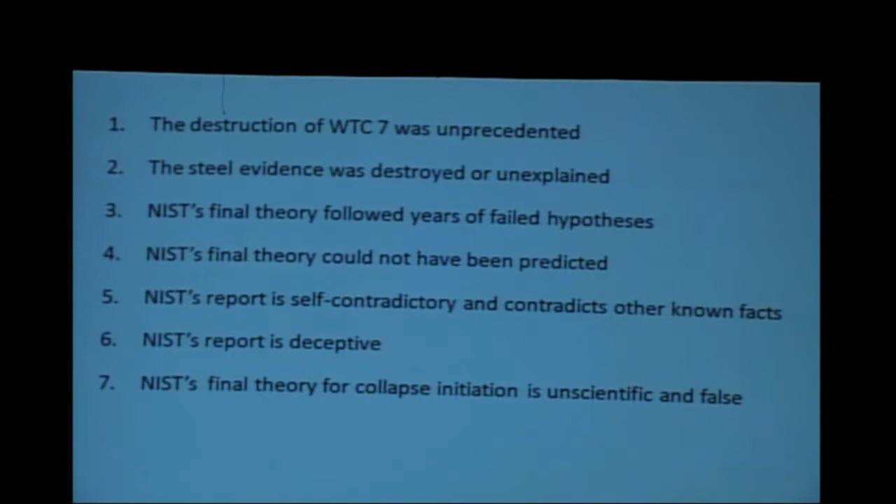And finally, I will summarize how NIST's report was deceptive in many ways and how NIST's final theory is unscientific and false. I'll cover NIST's report only up to the point of collapse initiation, and my colleague Tony Szamboti will take it from there, and he'll discuss the structural aspects and dynamics of building collapse and the NIST report in that respect.

So again, it's a non-controversial fact that the destruction of Building 7 was unprecedented. Both of the major investigative bodies of the government made statements to that effect. FEMA, the first investigative body, said the performance of Building 7 is significant because it appears the collapse was due primarily to fire rather than any impact damage from the collapsing towers. This was when they published their report in 2002. And NIST said this was the first known instance of total collapse of a tall building primarily due to fires.

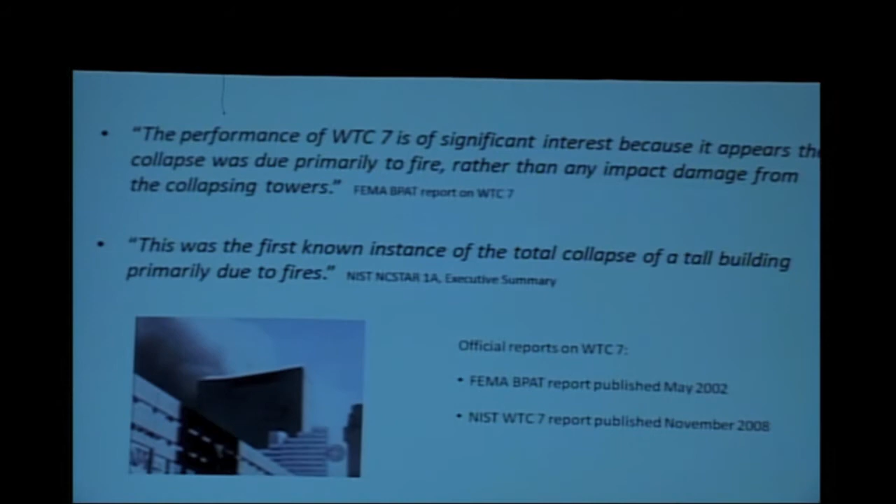And as we've discussed already today, there have been many fires in tall buildings over a period of more than 100 years, but there's not been one instance outside of 9/11 in which a building has suffered complete global collapse from anything other than demolition. Even on 9/11, not all the buildings that were on fire suffered global collapse.

Government scientists spent years trying to offer non-explosive explanations for the destruction of Building 7. The most influential hypotheses and the most long-lasting included one that said that fires fed by diesel fuel tanks within the building were responsible for generating extraordinary heat.

The New York Times reported that massive structural beams that functioned as a sort of bridge to hold up the 47-story Building 7 were compromised in a disastrous blaze fed by diesel fuel, leading to the building's collapse, investigators have concluded in a preliminary report. That article from the New York Times was not exactly accurate.

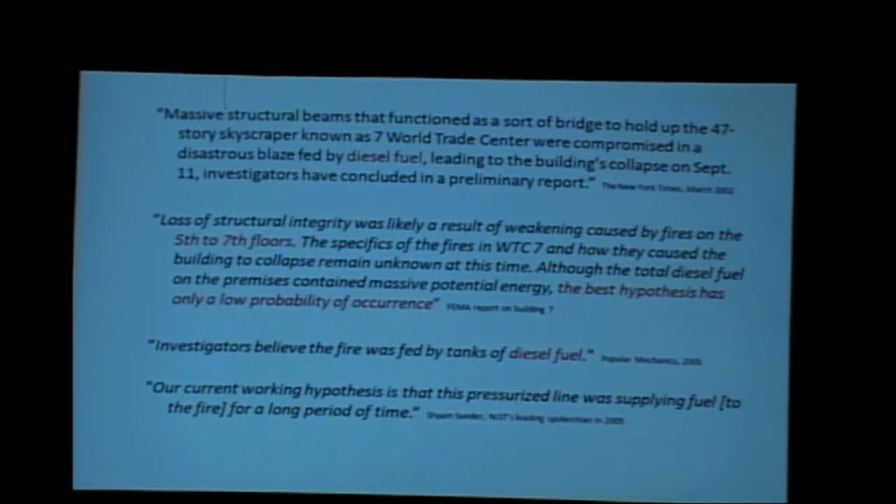The specifics of the fires and how they caused the building to collapse remain unknown at this time, although the total diesel fuel in the premises contained massive potential energy, and the best hypothesis has a low probability of occurrence.

They were supported by popular media, Popular Mechanics specifically, which said that investigators believe the fire was fed by tanks of diesel fuel. You may know that this book by Popular Mechanics is often referred to by people who are supporting the official story. And Shyam Sunder, who was mentioned before, said our current working hypothesis is that this pressurized line was supplying fuel to the building and the fire for a long period of time.

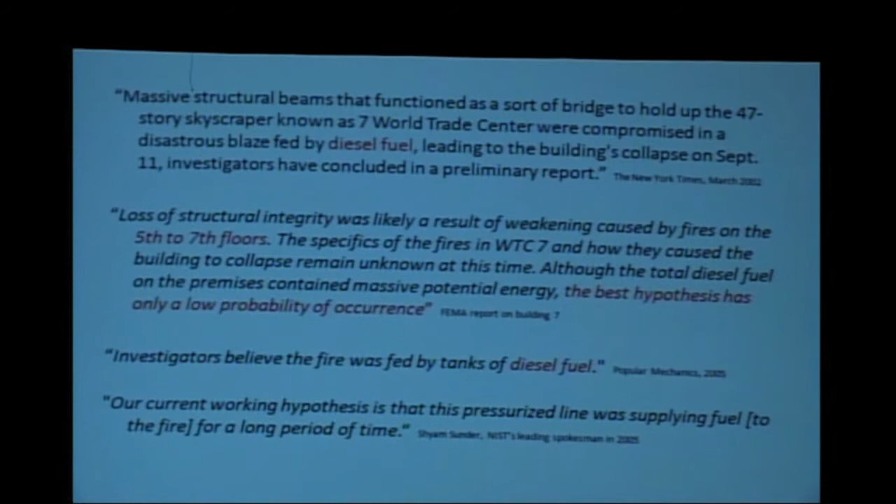Although this hypothesis was promoted for years, neither the diesel fuel nor the transfer girder failure made it into the final theory. Diesel fuels were not the cause, as NIST said. Diesel fuel fires did not play a role in the collapse of Building 7. Damage from the falling Tower 1 was also not the cause. That was often referred to.

Other than initiating the fires in Building 7, the damage from the debris from Tower 1 had little effect on initiating the collapse of Building 7. And again, the design of the building over the Con Ed substation with the transfer girders you see in the diagram below, that was also not the cause.

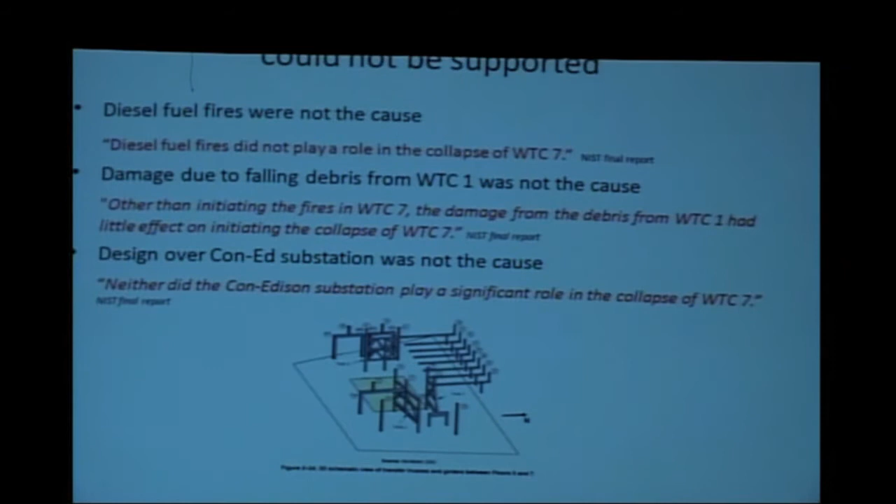What scientists and forensic investigators usually do is look for evidence. We know that there was no precedent for such an event, but what evidence do we have for a fire-based theory? Unfortunately, most of the physical evidence was destroyed, and NIST said that no steel samples from Building 7 were available for its investigation. That was not true, and we'll see that.

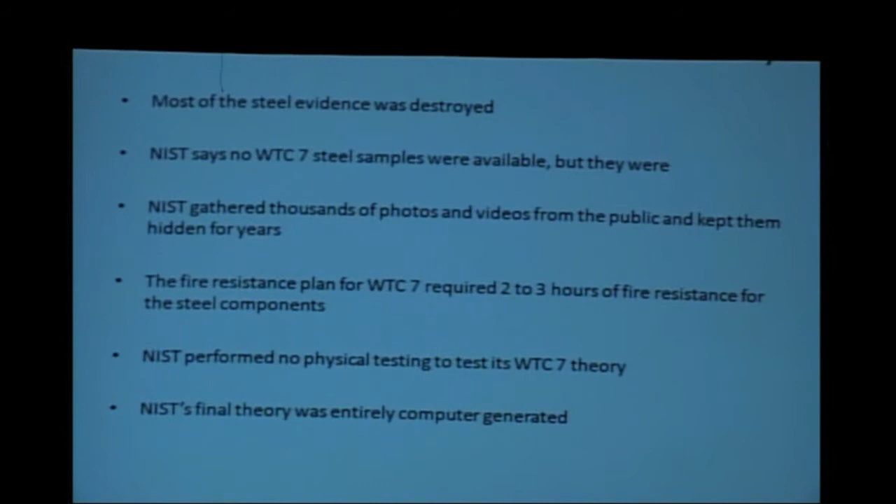Additionally, NIST collected thousands of photos and videos from the public over a period of years and kept them hidden from the public. They have only recently released some of those. We also have documents that establish the fire resistance plan for the building, and that is important evidence related to a fire-based theory.

Important evidence also could have been gained through physical testing of steel components. Unfortunately, no such testing was done, despite the fact that the testing would have been relatively easy and straightforward. In the end, this theory was based entirely on computer modeling.

As we see here, the U.S. House Committee on Science reported on the destruction of the steel evidence. They said in the month that lapsed between the terrorist attacks and the deployment of the FEMA team, a significant amount of steel debris was removed from the rubble pile, cut into smaller sections, and either melted at the recycling plant or shipped out of the U.S. Some of the critical pieces of steel were gone before the first FEMA team member ever reached the site.

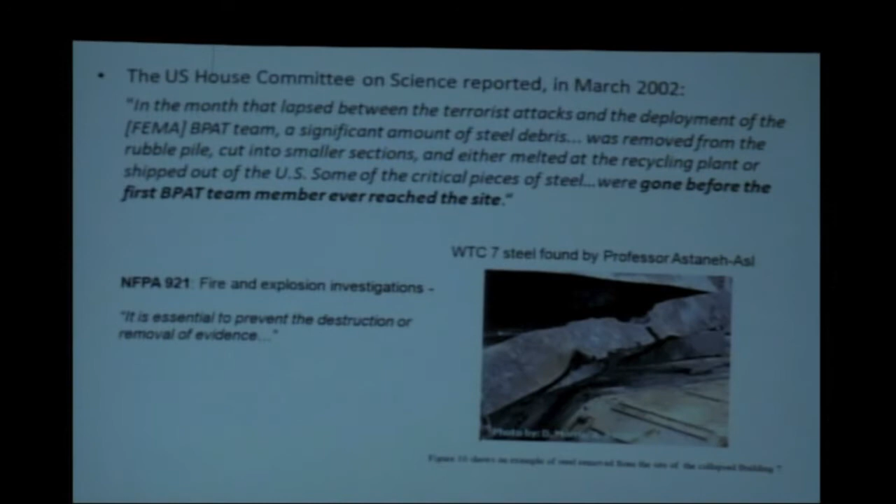This unprecedented destruction of evidence continued throughout the cleanup effort, even when the investigators were there. A good question that remains unanswered is why did official investigators, including the National Institute for Standards and Technology, not follow the national standard for fire investigation?

Part of the standard, which is called NFPA 921, states that it is essential to prevent the destruction or removal of evidence. That may seem obvious to most of us. Removal of the evidence may have had something to do with the nature of the evidence itself.

NIST told us that not one piece of steel from this huge building was left for its investigation, but that was not true, as I said. This sample was photographed by a professor from the University of California in Berkeley. He had been granted access to areas near Ground Zero through a National Science Foundation project.

He examined a number of unusual samples as early as 1 week after 9/11, and this sample looks like it has some odd burns or cuts in the steel, and that same professor later stated that he saw melted girders at the World Trade Center.

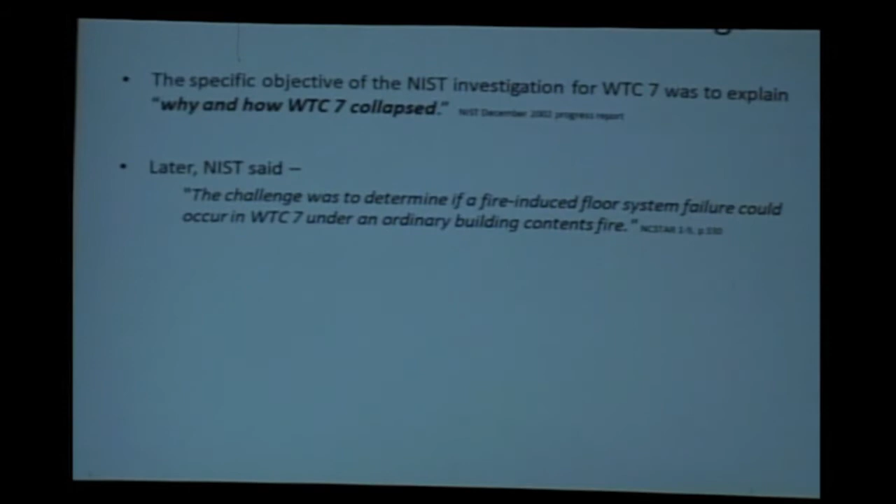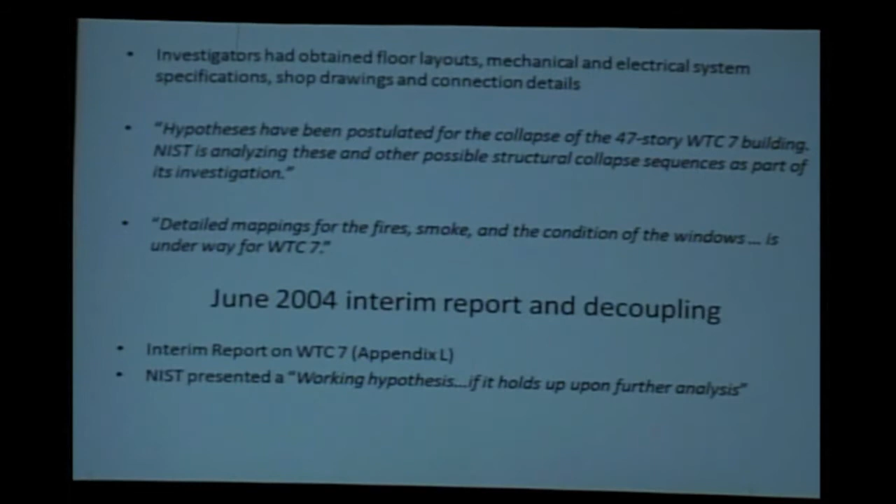By December 2003, investigators had obtained a great deal of information on the building, and their report said that hypotheses have been postulated for the collapse of the building. NIST is analyzing these and other possible structural collapse sequences as part of its investigation. Detailed mappings for the fires and so forth are underway for Building 7. And as I said, NIST had also started gathering thousands of photos and videos, which they effectively kept away from the public.

In June 2004, NIST published an interim report on Building 7, and they presented what they called a working hypothesis. It was basically the diesel fuel fire idea, the transfer trusses in floors 5 through 7, if it holds up upon further analysis. NIST might have wanted to gloss over its first 2 years of investigation into Building 7 because it did not want to acknowledge some of the things in its 2004 interim report that contradicted its final report.

At the time of the 2004 interim report, NIST was still looking at many different hypotheses. None of these hypotheses, or any of NIST's earlier reports, had much to do with the final theory, and none of them had anything to do with explosives.

A shocking admission was made 2 years after the 2004 interim report by NIST lead investigator Shyam Sunder, who made it clear that they had little or no idea what happened to Building 7 at that time. This is very startling in the fact that by 2006, construction had been completed on a new Building 7 that was placed in the exact same location. It was 52 stories tall. It took 4 years to complete, and we still didn't know what happened to the first one.

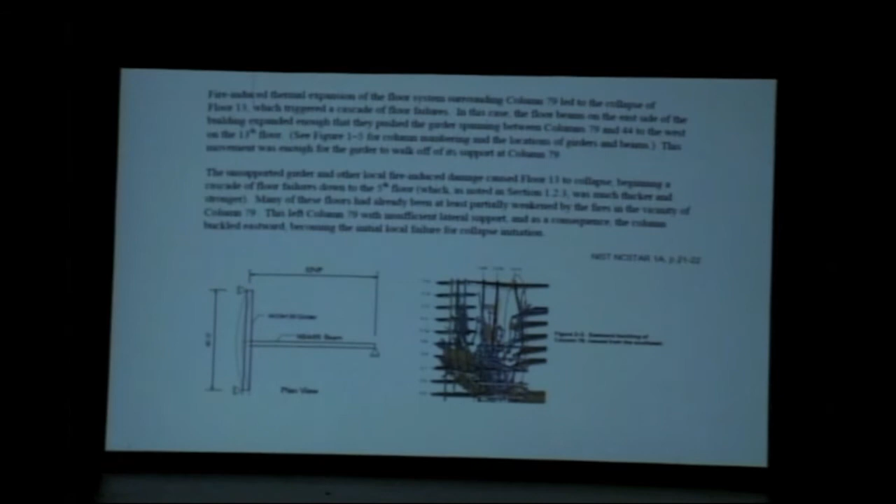Fire-induced thermal expansion of the floor system surrounding column 79 led to the collapse of floor 13, which triggered a cascade of floor failures. In this case, the floor beams on the east side, actually on the northeast corner of the building, expanded enough that they pushed the girder spanning between columns 79 and 44 to the west on the 13th floor. This movement was enough for the girder to walk off its support at column 79. The lower left diagram is kind of a depiction of how NIST envisions the girder being pushed by a beam.

And the result was that the unsupported girder and other local fire-induced damage caused floor 13 to collapse, beginning a cascade of floor failures down to the 5th floor. I'm not going to actually talk about that. We'll leave that to Tony. But the diagram on the lower right is a depiction of that, with the critical column being left unsupported and then buckling.

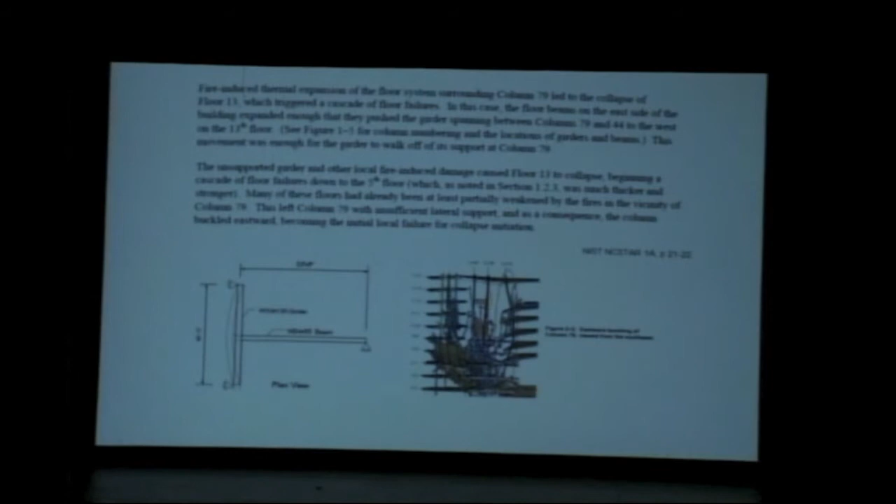So one thing we might begin with is, since NIST's collapse initiation sequence begins with thermal expansion, and to be more specific, linear thermal expansion of the floor beams, we must ask, is thermal expansion a new phenomenon, as NIST has implied? The answer is absolutely not. Thermal expansion is well known, and its effects on building components have been tested. One well-known series of tests occurred in the UK at the Cardington Fire Test Facility.

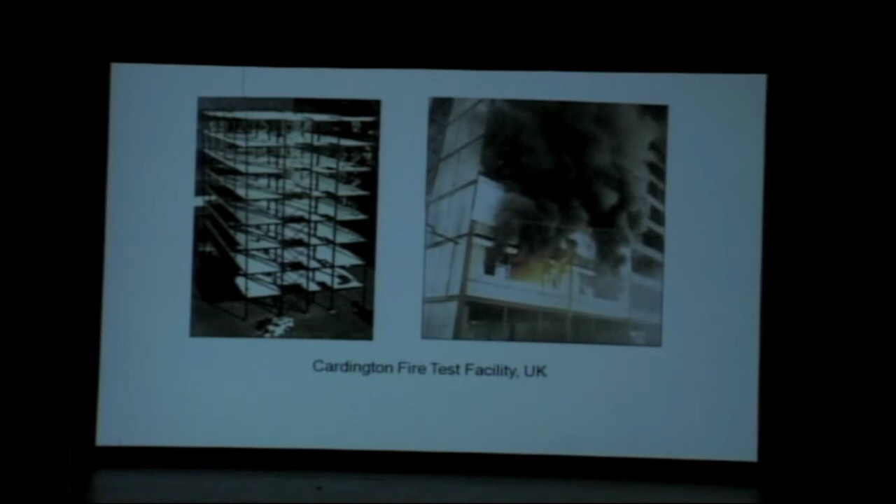Tests done at Cardington under severe fire conditions showed that floor beams will deflect downward in response to thermal expansion. This is particularly true because the floor beams are made composite with the floor assemblies, as we'll discuss. And this means that shear studs are used to attach the beams to the floors and make them one piece. Without the studs, the beams could also deflect laterally or sideways to relieve the stress of expansion.

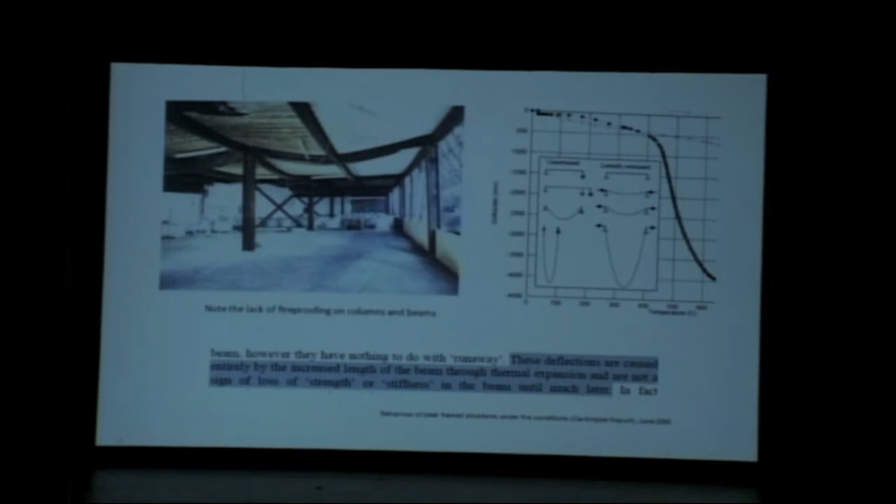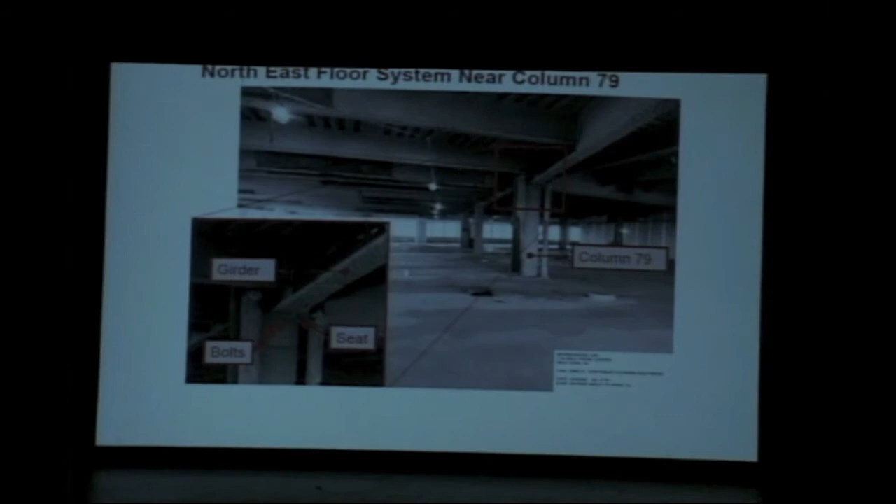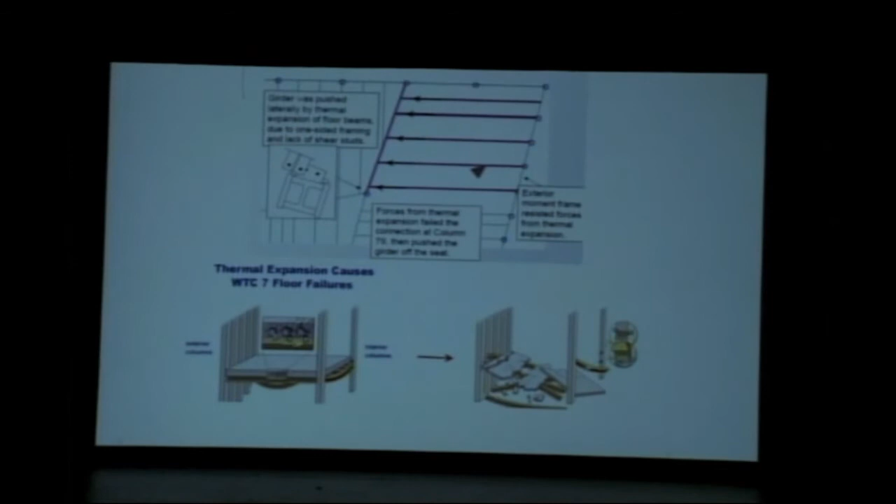Here's another diagram from the NIST report that shows NIST's view of how the floor beams on the northeast side of the building, shown here as purple lines, pushed against the critical girder. The girder connected column 79 to the external wall at column 44. The girder to column connection is blown up in the inset diagram, composite with the floors. You can see in the diagram here how the studs connected the floors to the beams or girders.

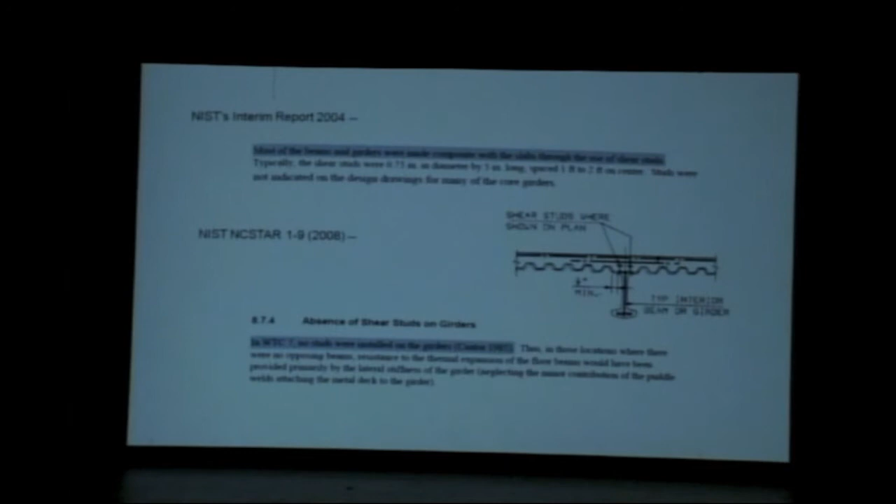The NIST interim report said that most of the beams and girders were made composite with the slabs using shear studs. The exception, they pointed out, was a lack of drawing notes for core girders, and the girder in question is not a core girder, meaning it was not within the core section of the building, but was connected to the external wall. Unfortunately, NIST changed its mind on this with its final report. NIST did a reversal, and they said that no studs were installed on the girders. This point is very important to NIST's theory.

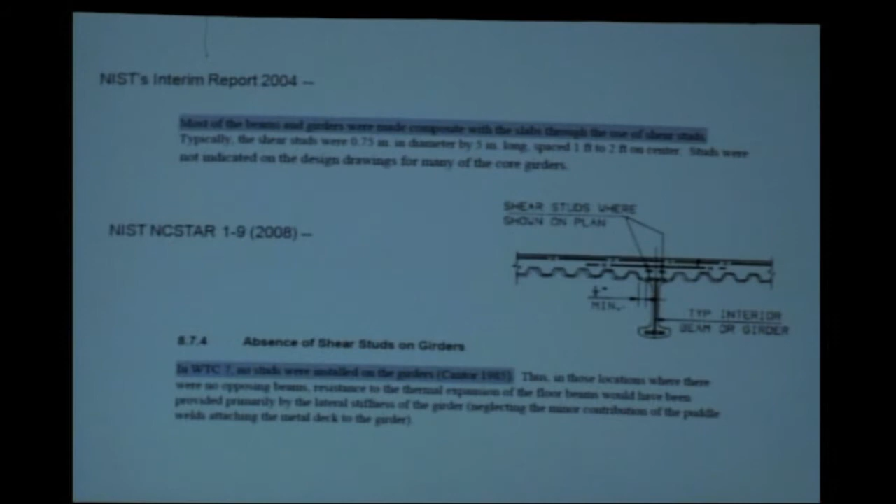Unfortunately for NIST, it was not just its own 2004 interim report that contradicted this vital aspect of the final theory. The presence of shear studs on that critical girder was also described by John Salvarinas, who was the project manager for Building 7, from the company that supplied the steel components. Salvarinas wrote an academic paper about Building 7 in 1986, describing the construction in detail.

NIST referred to that paper, as I show here, in its interim report, but did not mention it in its final report. That may be because this diagram from Salvarinas' paper shows where the author indicated the presence of 30 shear studs on that critical girder.

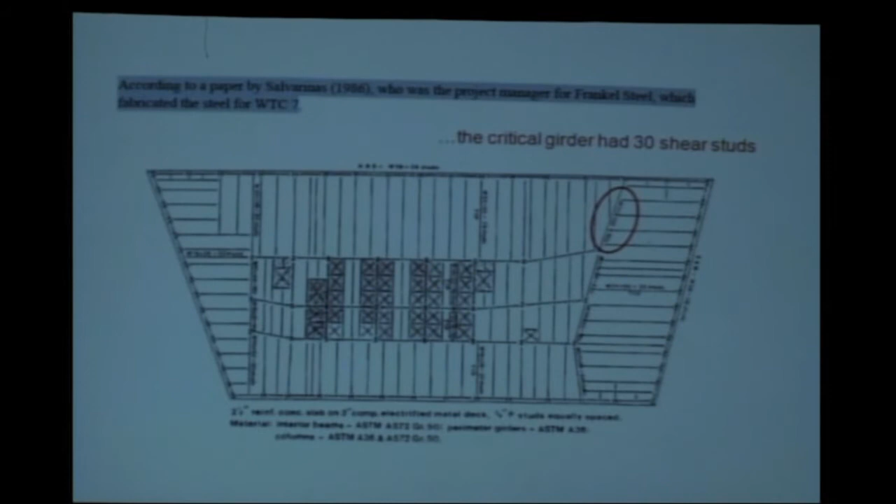But how could thermal expansion cause the breakage of what would be 28 shear studs on each of the 5 floor beams, 30 shear studs on the critical girder, and 4 bolts connecting the girder to column 79? The mechanism NIST proposed is called differential thermal expansion. This is where the expansion of the beam is much greater than the expansion of the floor above it, and it causes shear stress. The expansion actually moves in both directions, but NIST said the external wall was strong enough to withstand it, so all of that expansion moved towards the critical girder.

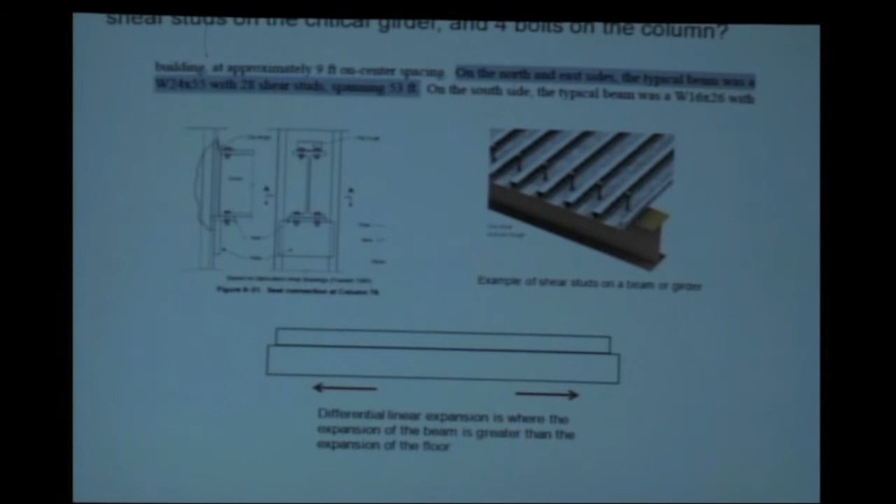Because thermal expansion is a function of temperature, again, we need to take a look, as we did with the Cardington test results, to see if it's a new phenomenon, as NIST suggests. But you can see that it's actually been a consideration throughout history, as these 2 building professionals from Australia pointed out when they wrote a response to NIST on the Building 7 report. These building professionals reported that they had actually done physical tests to see what thermal expansion would do to floor assemblies that were bolted to floor beams and girders. These were just the kinds of tests that NIST should have done.

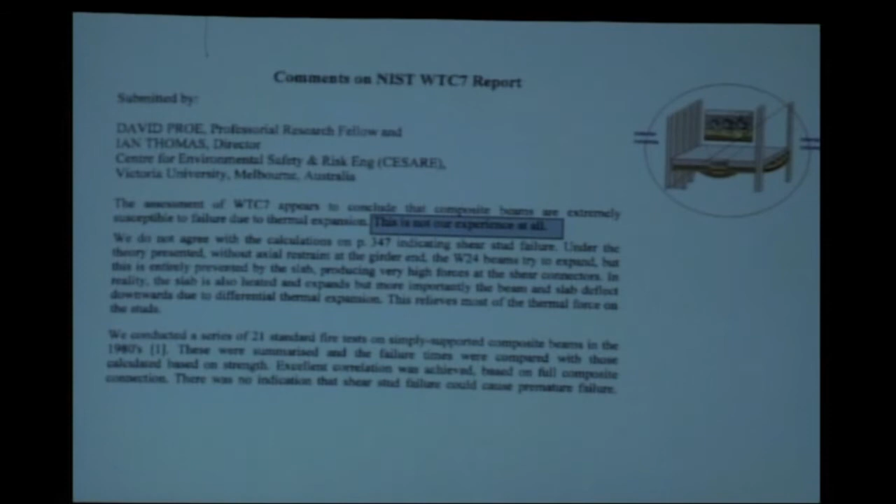Because they had actually done the test, the Australians were able to state that what NIST proposed was not their experience at all, and that they did not agree with it. The shear studs would not fail because the floor slab was heated as well, and since the concrete in the floor slab has an expansion coefficient that's very nearly the same as steel, the entire composite would expand together. So NIST's final theory is at odds with actual experimental evidence from the testing of real floor assemblies.

Another thing we have to take a look at is just how far that girder would have had to be pushed for it to walk off its seat, as NIST suggests. NIST reported that the seat at column 79 was 11 inches wide. The structural diagrams actually say the seat was 12 inches wide, but we won't bicker on that because you'll soon see that it doesn't matter. If we assume that the seat was 11 inches wide, NIST says the girder had to be pushed at least 5.5 inches, or half of that distance, to walk off the seat. And the reason they say that is that they need what's called the web, or the vertical section in the middle of the beam, to actually push all the way to the edge so that the majority of the mass of the girder would fall. So half the distance has to be reached.

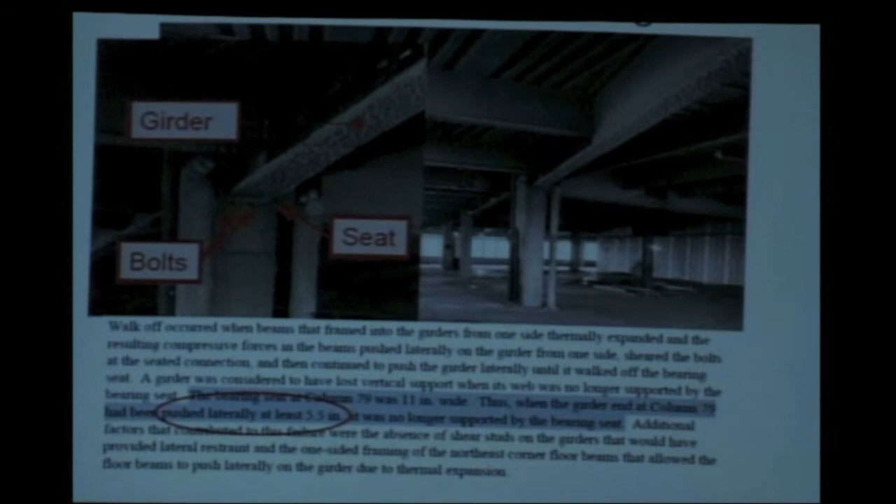Let's take a look at what temperature NIST says the beams reach so that we can estimate how much they expanded. This was a tricky question for NIST, and we can see throughout its report on Building 7 that NIST struggled with this answer. It was tricky because at temperatures as high as 600 degrees Celsius, which NIST says the floor beams reached on the south and east areas of floor 12, the steel will lose strength and stiffness and therefore not be able to extend and push into the girder. At the same time, if the temperature is not high enough, there won't be enough expansion of the beams.

What NIST settled on was the idea that just on the northeast corner of floor 12, the beam temperatures only reached 400 degrees Celsius. Apparently, NIST investigators felt that with this distribution of temperatures in their computer models, they could show that the critical beams on the northeast side would remain rigid, whereas all the other floor beams on the south and east areas of floor 12 would be hot enough. Actually, floor 13, the ceiling of floor 12, would be hot enough so that when the girder on the northeast fell off, the floors would be ready to collapse in unison. Again, it's hard to believe that anybody could have ever predicted any of this.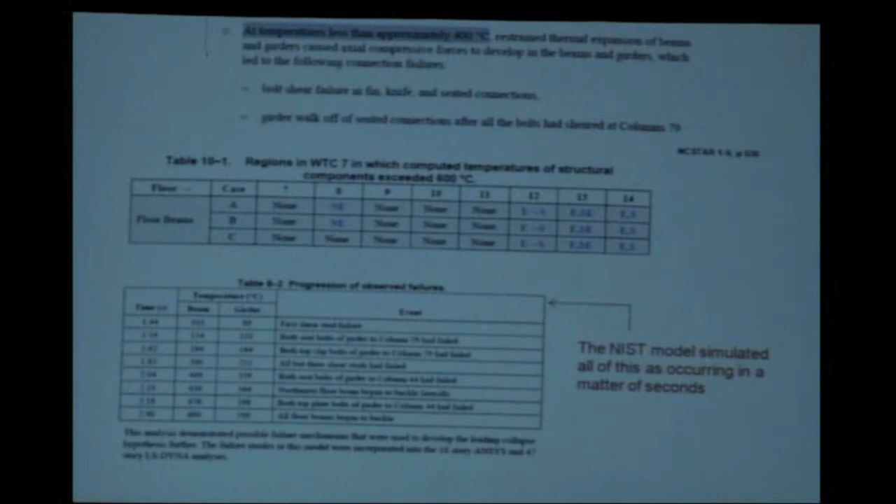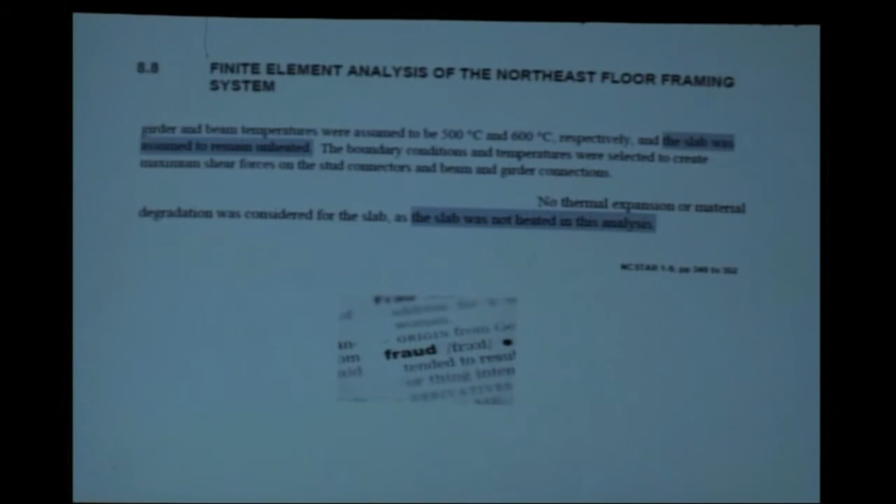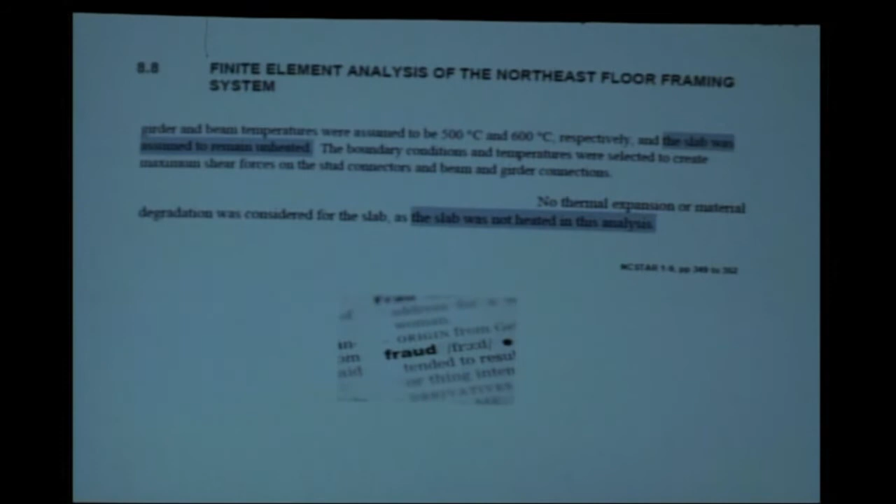Once the temperature distribution needed for the theory was settled, NIST found a way to suggest that the differential thermal expansion could be possible, at least in the computer. They simply didn't heat the floor slab. You can see here that despite NIST's claim in several parts of its report that the beams on the northeast corner reached a temperature of only 400 degrees, in the computer model, the beams on the northeast corner were heated to 600 degrees. More importantly, the floor slabs were left unheated.

So if you heat the floor beams to an extreme temperature and leave the slab unheated, there will be differential thermal expansion, but only in the computer. This is what most scientists would call fraud. But NIST theory has more problems than that. Given NIST's temperature scenario, the amount of expansion by the beams would not satisfy the amount of expansion that NIST said was required.

NIST provided an example of the equation that scientists use to calculate thermal expansion. This equation requires only the length of the object, the coefficient of expansion for that material, and the change in temperature. NIST's example here uses the girder length of 45 feet, and they used 600 degrees Celsius in this example, but neither of these values are applicable to the initiating event.

If we put the right values in the equation, including the length of the beam, which was 53 feet, the change in temperature for the beams, not the temperature they reached, but the change on the northeast corner from room temperature to 400 degrees, we see that the maximum expansion would be 3.3 inches. That's all it can do, and the 3.3 inches would not be enough to cause the girder to walk off its seat. Therefore, NIST theory is not only disproven by the actual physical tests performed by the Australians, it's disproven in theory as well.

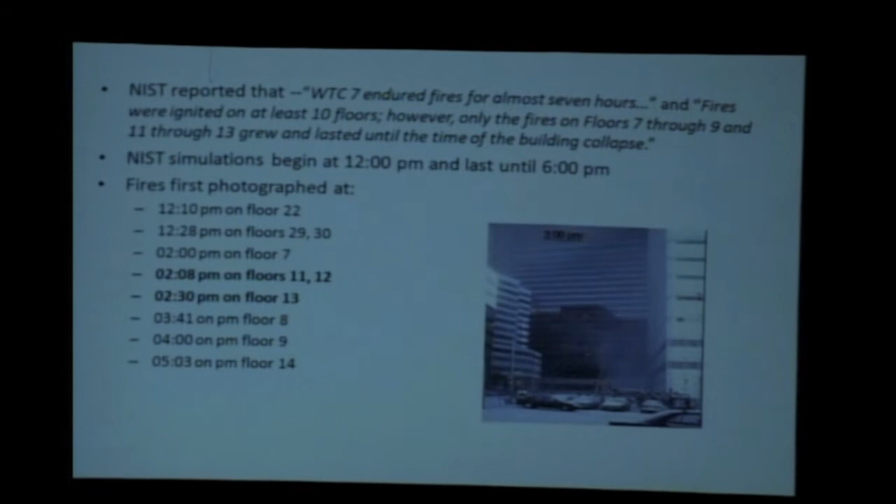Despite the fact that we have already seen that NIST theory is unrealistic, we should look further to get a better picture of how NIST was able to convince people that it was realistic. One thing NIST said was that there were 7-hour fires in Building 7, which gave the impression that the fires were very long and very hot. It seems odd, on a side note, that NIST computer simulation covered a time period beyond the actual collapse of the building, going to 6 p.m. In any case, photographs show that fires were known to exist on some floors as early as just after noon. Those early photographs did not show fires on the floors of interest, which are now floors 11 through 13, until after 2 p.m. So the first evidence shows fires on those floors after 2 p.m.

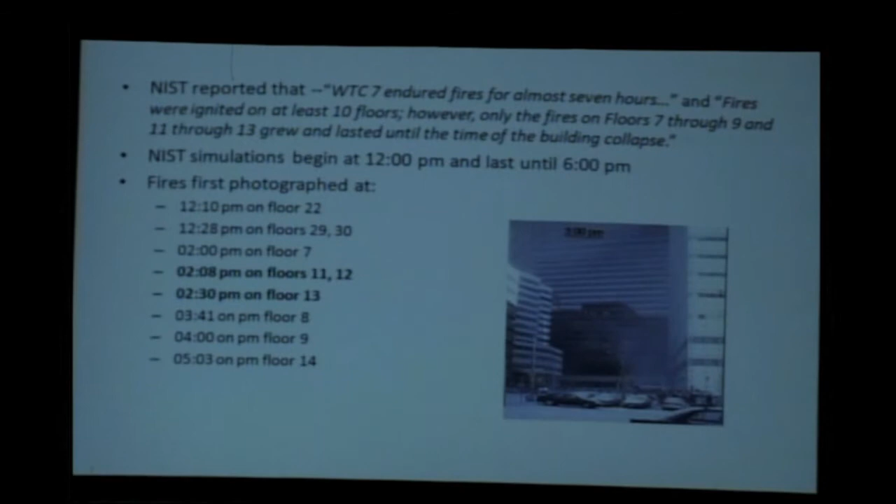How the fires in Building 7 started is even a mystery. Some buildings that were damaged by falling debris did not have fires. For example, the Deutsche Bank building was severely damaged over a long stretch of the building, but did not have any fires. NIST suggested 2 scenarios for starting the fires in Building 7, so they actually haven't settled on one of these. The first was that falling debris from the North Tower started the fires in some unexplained impact manner. Due to the design of the building, fires could not be spread from floor to floor, so the scenario would require that at least 10 separate fires, because we saw fires on 10 floors, were started separately through the impact damage on the southwest side, which is where the impact damage was.

The second scenario NIST suggested was that because fires were burning on the ground around Building 7, whatever ignition sources caused those fires might have entered into Building 7, again through the damaged areas, and started fires in Building 7. So they weren't really sure. There were some unusual fires burning in the area around Building 7. Here you can see some of the vehicles on the east side, just outside the building. These fires burned so hot that the tires, the plastic parts, and the interiors were all gone afterward.

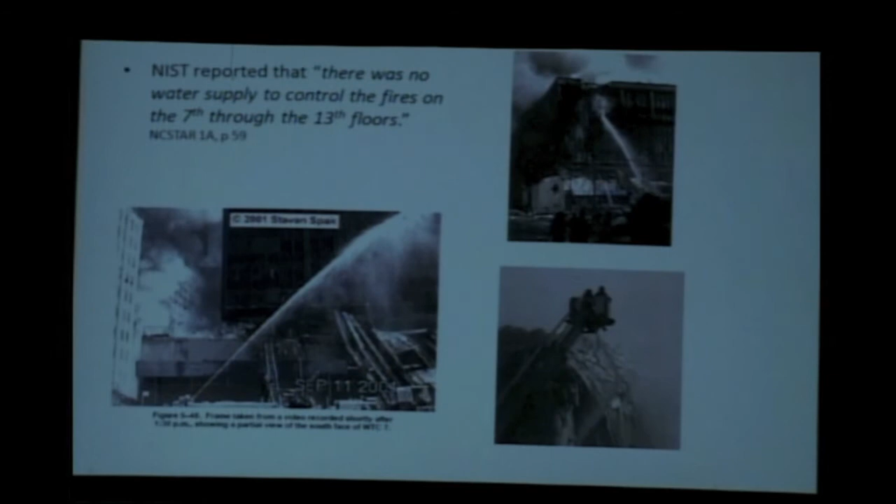As these photos show, firefighters in the area seem to have plenty of water to fight the fires in Building 6 and Building 3, but they left Building 7 to burn.

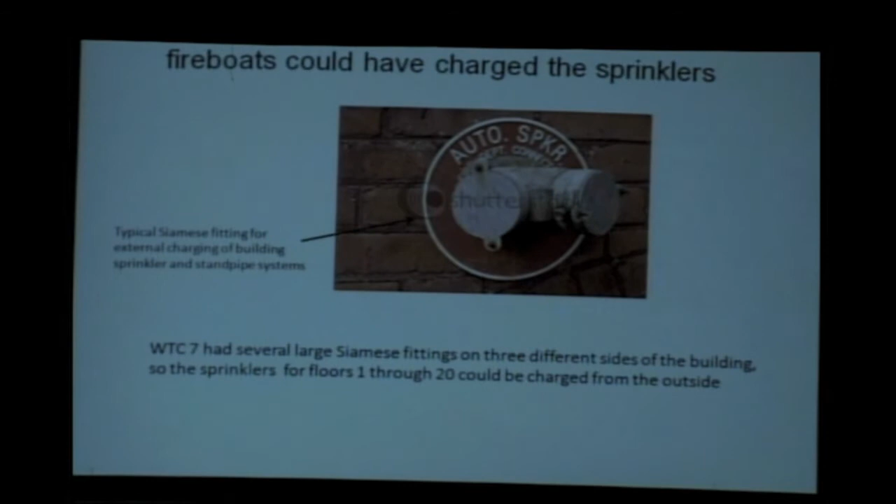Building 7 had an internal water system to supply the sprinklers on floors 21 through 47, but the water for the sprinkler system on floors 1 through 20 was supplied by the city water system, which had been damaged by falling debris. Building 7 also had Siamese fittings, which allowed water from external sources to charge the sprinkler system on the lower 20 floors. So we can only speculate as to why this was not done.

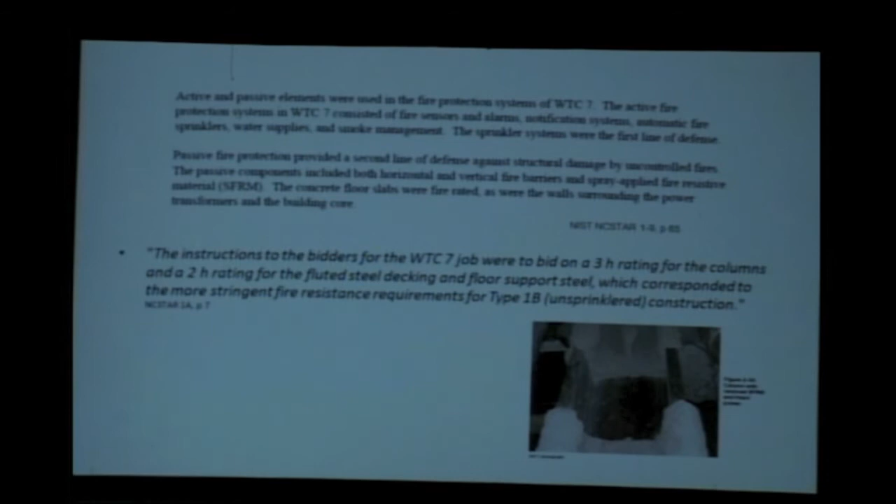The sprinklers were not the only part of the fire resistance plan for Building 7. As these excerpts from the NIST report show, the sprinklers were only the first line of defense against the fire, but the second line of defense was the passive fire protection or fireproofing. This is how I came to be aware of the problems at the World Trade Center because my former company, Underwriters Laboratories, is the source of fire resistance information that engineers and architects use to select building components.

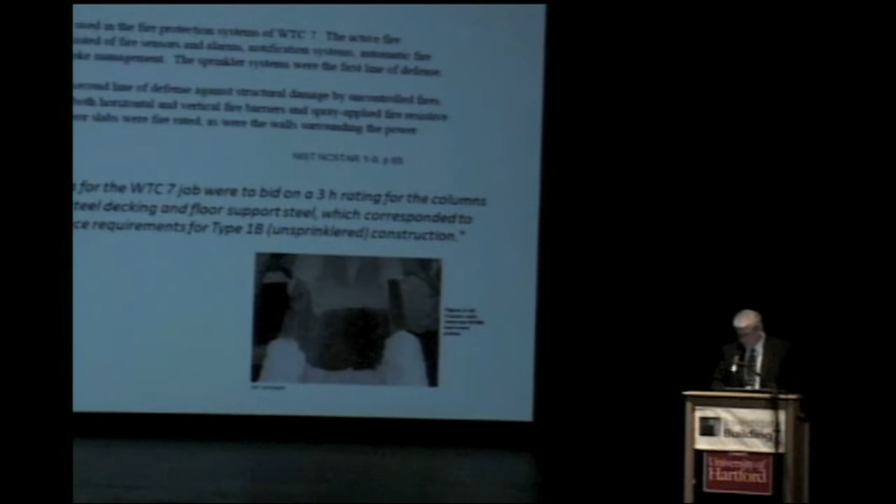As you can see here, there were requirements for fire resistance of the columns and floor steel in Building 7, just as there is for any skyscraper. The requirements were that these steel components must withstand at least 2 to 3 hours of intense fire in standard tests. This photo shows a little bit of the fireproofing scraped away, so you can see how that's applied.

Through testing in Underwriters Laboratories, the steel components are given fire resistance ratings based on thickness of fireproofing material that is applied. The NIST report for Building 7 gives these values from the UL Fire Resistance Directory. The NIST report also confirms that fireproofing was applied correctly and was not damaged by falling debris, at least not in the areas where the failure is said to have occurred.

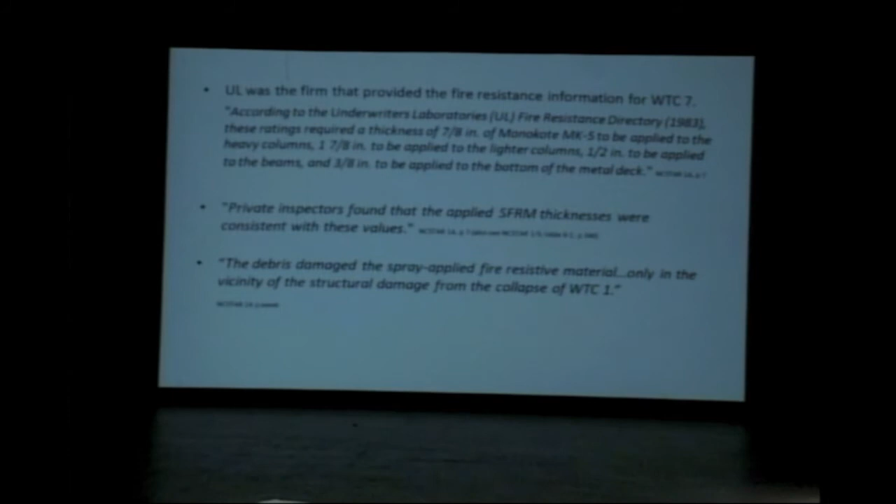One member of the advisory committee asked, "Fire moved every 20 minutes. Essentially, it started and stopped every 20 minutes. So if you do not have fuel in Building 7, how could fires burn for as long as they had and taken out this major structure that had good fireproofing?"

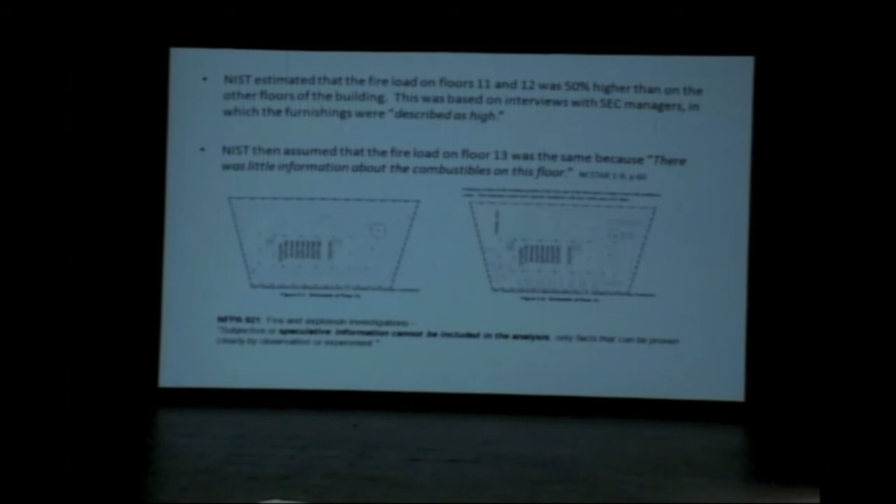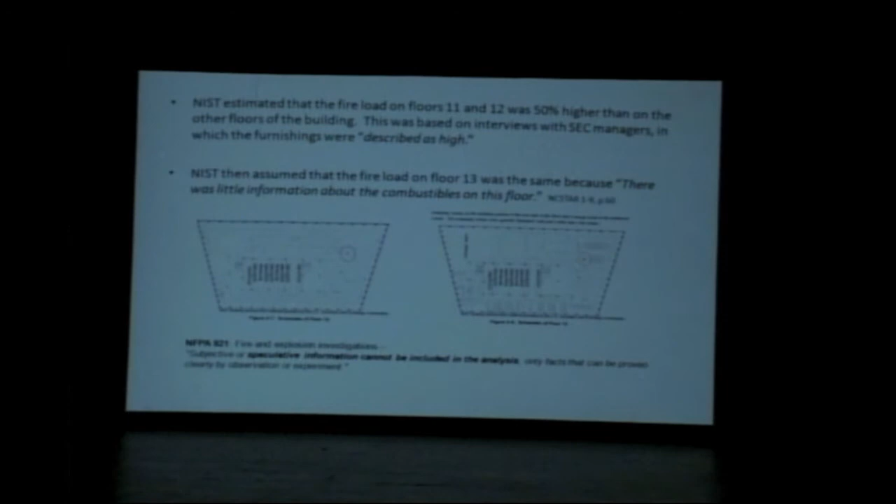And then NIST simply estimated the fire load on floor 13 by saying it was assumed to be the same as the floor 11 and 12 fire load. And they did this because they said there wasn't much information on floor 13. And again, going back to NFPA 921, the national standard for fire investigation, speculative information like this cannot be included in an analysis. It was all pretty confusing for anyone trying to follow the story. And again, we should note that NIST was not following that standard, and NIST methods were certainly not scientific.

Anyway, NIST took these assumed fire loads and, along with other parameters, like the thermal conductivities and the densities of the materials involved, the details about the building structure and connections, they put it all into a series of computer experiments. As we can see here, NIST computer simulations are actually the result of 4 separate computer models, each one built on an entirely different software and used for different things. There was a fire dynamics simulator that was used to simulate the fires and estimate gas temperatures. And then a program called Fire Structure Interface was used to estimate the temperatures imposed on the structural components.

There was a finite element analysis model called ANSYS that estimated structural responses. This is where NIST proposed 3 thermal cases to study. Case A, in which the temperatures were taken directly from the 2 previous simulations. Case B, which used arbitrarily chosen temperatures that were higher than those generated by the previous simulations. And Case C, which used lower temperatures. Not surprisingly, Case B, with the higher temperatures, was what NIST settled on. Finally, the worst-case scenarios from the ANSYS model were fed into a global analysis program called LS-DYNA.

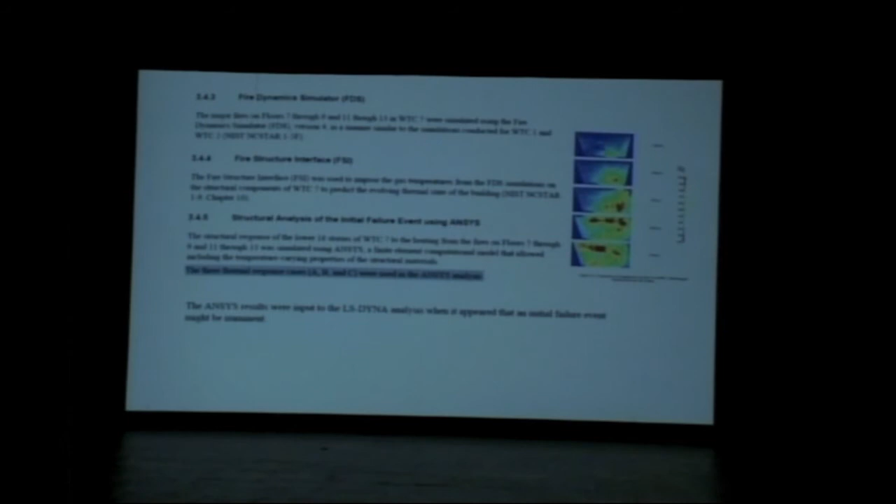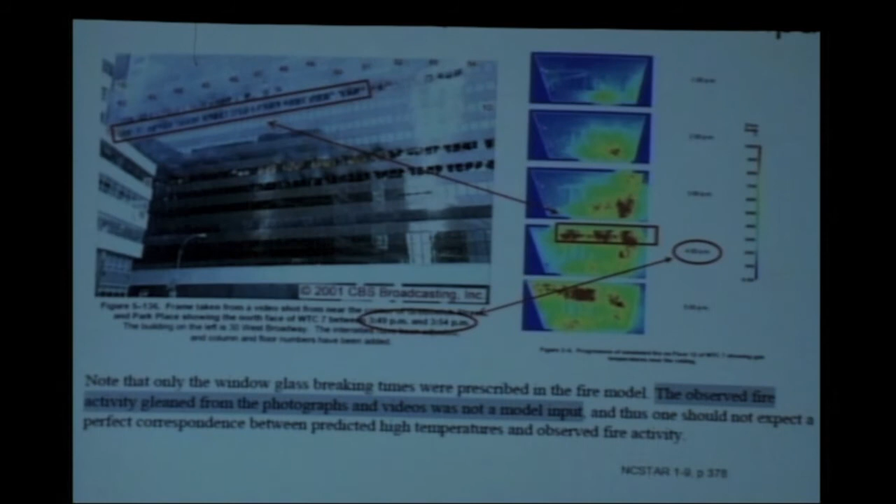Just how long did the fires last in the northeast areas of floor 12, where NIST said the initial failures occurred? NIST theory requires fires that lasted 4 hours in those areas. And although NIST refers to observed events, trying to match things to observed events, there's no one who observed the girder fall off or column 79 buckle.

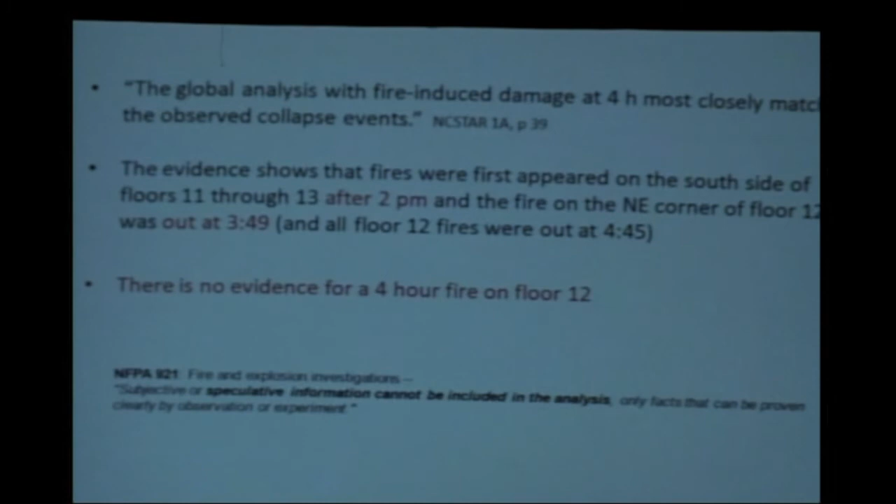But the evidence indicates that the fires on those floors began on the south side of the building, as we saw, after 2 p.m., and in the northeast corner of floor 12, the fires were out sometime before 3:49 p.m., probably closer to 3:15. So there's no evidence for a 4-hour fire on floor 12 at 5:20 or at any other time. Again, the photographic evidence tells us that the fires on the northeast corner of floor 12 burned out nearly 2 hours before the building fell.

So let's review some of the deceptions we've seen in the NIST report for Building 7. NIST said that there were no Building 7 steel samples, but those samples were available. They were just left unexamined. NIST said that they took 3 years for their investigation, but they took at least 5 years. NIST said that there were 7-hour fires in Building 7, but evidence suggests the fires were much shorter in duration.

NIST said that there was no water to put out the fires, but Building 7 sprinklers were functional and water was available. NIST said that there were 4-hour fires in the northeast corner of floor 12, but only 20 minutes of combustibles were available in any given location. And we've seen that the duration from photos could not have been as long.

NIST said there were no shear studs on the girder. This is contradicted by NIST's own interim report and by the building project manager, Salvarinas. NIST did not use photos of fire as model input. That's because the photos showed the fires were out. And NIST did not actually heat the floor slab in their model, and differential thermal expansion cannot be measured without heating both the beam and the slab.